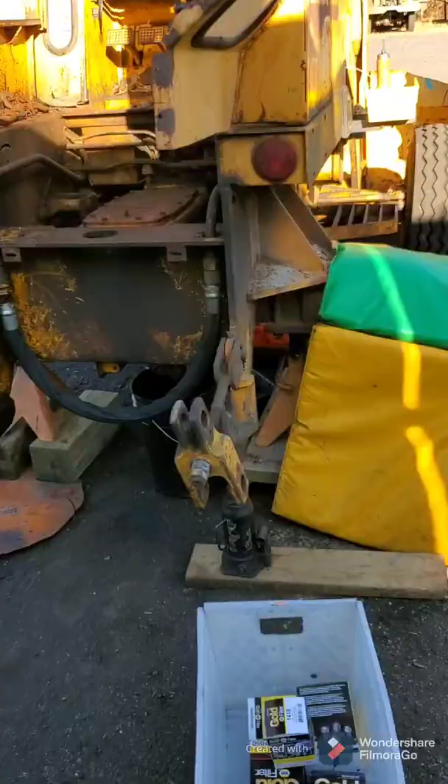Trying to get some seals changed in this thing, and it turned into a nightmare. So here's what I got. We have the backhoe off the machine, to get a better view of what's going on here.

I went to change the wheel seals. To change the wheel seals, you have to open up this cover. There's two large gears in here that have to be unhooked, so to speak. The large nut is like almost like a wheel bearing on the spindle, it just tightens up preload on a bearing here and on the outside. So to get the axle out, you got to slide it out, take the nut off, whatever.

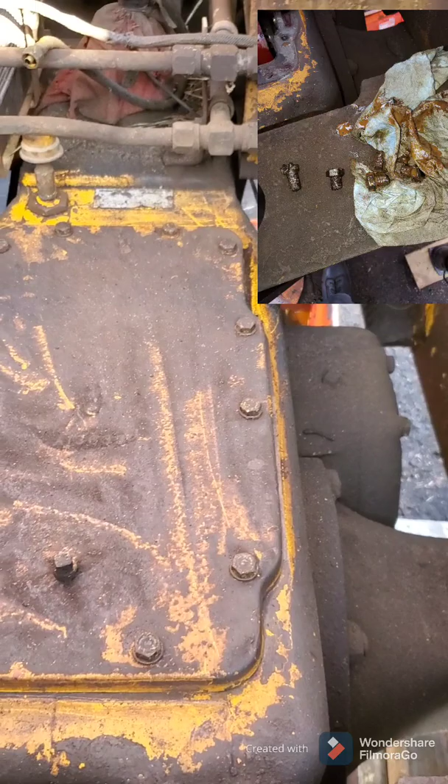Well, in the process of draining and cleaning, I found all the bolts in the ring gear were loose, and some were missing and crunched up in the bottom of the pan here. Which I've got new bolts here for. I'm going to fix that up, clean up the threads inside the ring gear.

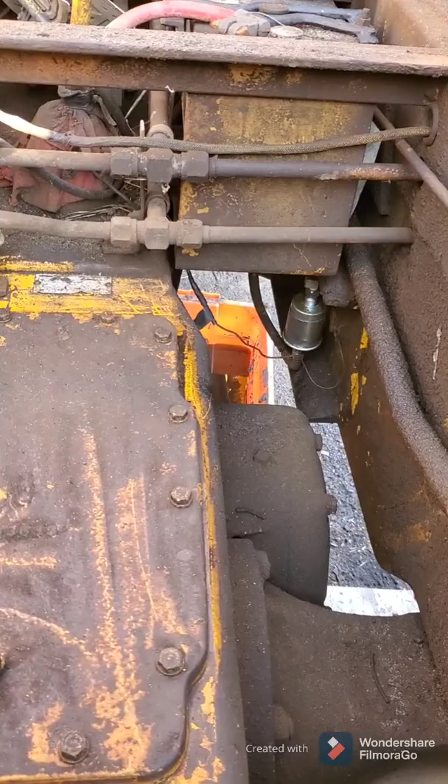But to get the ring gear and the carrier out, the brakes have to come off, and this is where the brakes are on this side, and same thing on this side. So I'm going to take this apart, get the brakes out of there, and then we'll be able to pull the carrier assembly out and get it on the bench to fix it.

As you can see over here, the fuel tank's out. This is the axle, and it might not look so big in the video, but that's the size of a spray can in diameter. So I've got some tools ready, I'm going to get to work here, and I'll be back with an update very soon.

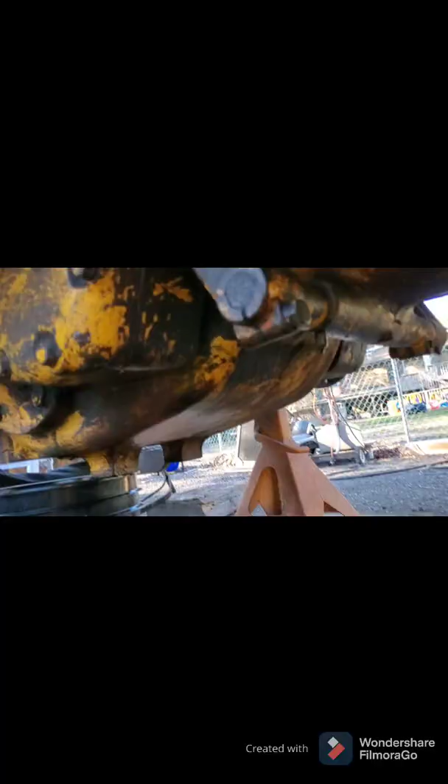Here's how we're looking from the bottom. This is the control for the brake, you get the pedal. This goes forwards, pulls on this rod, and actuates a series of discs inside here.

Pretty easy to get apart, it looks like. Frame of the machine is kind of high and tight, so that's nice, gives me a little room to work. And the other side is similar.

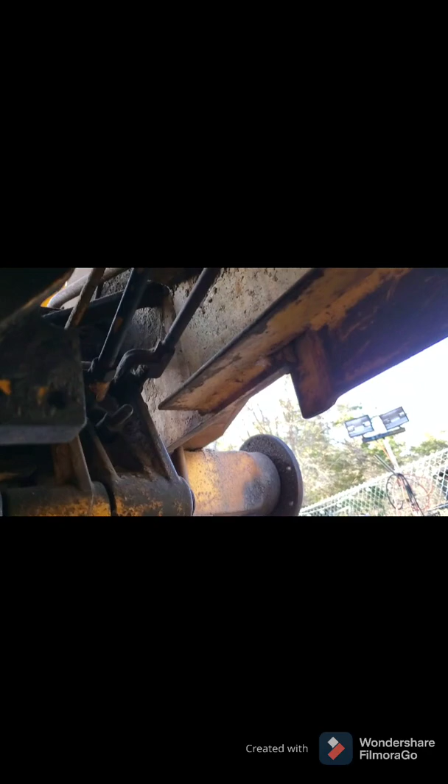You can see it just has some extra connections for the parking brake, which happens to work on this machine. Sadly, the brakes are in nice shape and they're adjusted well. I really hate to take this apart, but that's what I got to do. So let me get started here.

So the linkage rods for this linkage, which is the arm, just like the other side that controls the brakes, are under tension constantly from these large springs that return, which are tensioned up by this bolt. So I have to take the bolt out and get the tension off the springs. This way I can get the clevises out and unpinned, so we can remove the brakes from both sides, so I can get the actuating arm assembly to turn. So that's the next step.

By the way, I broke the adjuster nut off on this side, so now I'm going to have to find that, which is in my box of parts here somewhere.

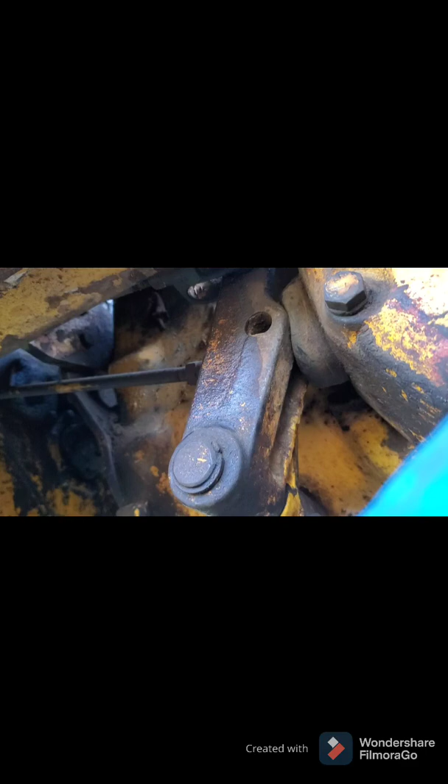There she is. One terrible thing about this machine is parts are not easy to find. Half the stuff I've bought, I just cross-referenced. I bought maybe 3 things from Case in the process of working on this thing. Luckily, I'm very resourceful.

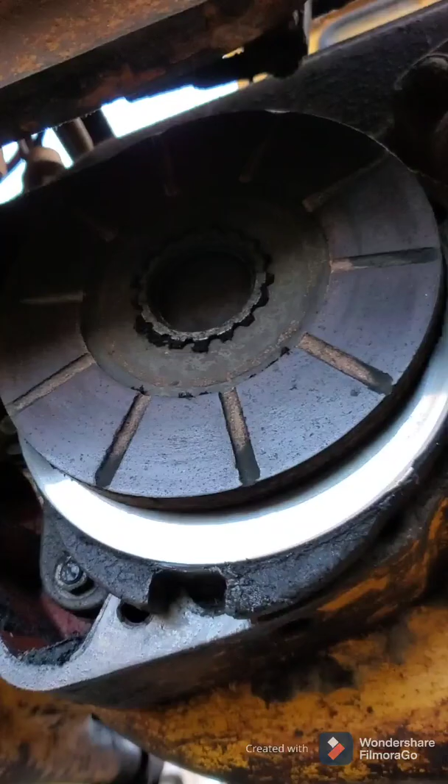Okay, so I got the brakes opened up. These are a very weird design, it's a tractor thing, you won't see this on any kind of cars or trucks. There's one of, I guess you'd call it a disc or a surface. And here's how the rest of the brakes work, these are a series of discs.

Guess I'm not putting this thing down, but anyway, it's a series of discs and a couple plates, and they ride on a spindle.

And luckily, these look real nice, because they're not available anymore, so I'm kind of glad to see that.

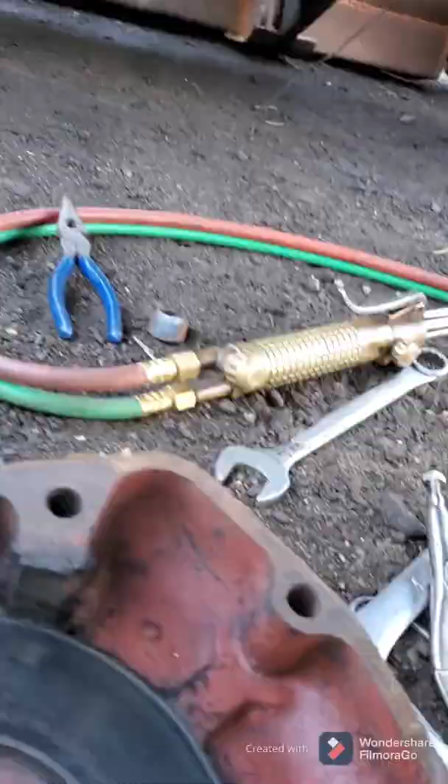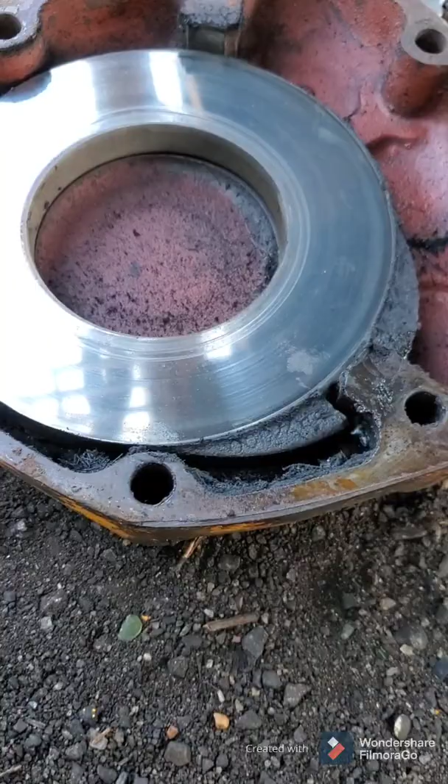And then that first disc comes out and rides against this, and rides against this. This plate is held in place by this tang, I guess you can call it, or detent. I don't know, it's not a detent, but the tab. And then there is another disc.

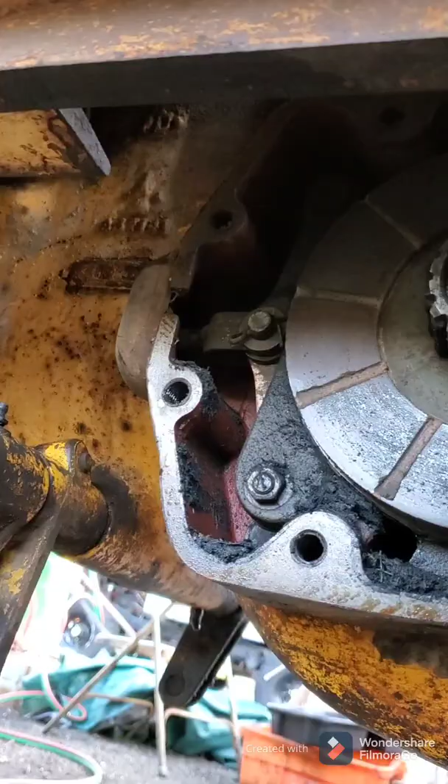Try and get this off of here. Doing this one-handed is a bit tricky. There we go. That's one, also looks really nice, I don't know if you can see that.

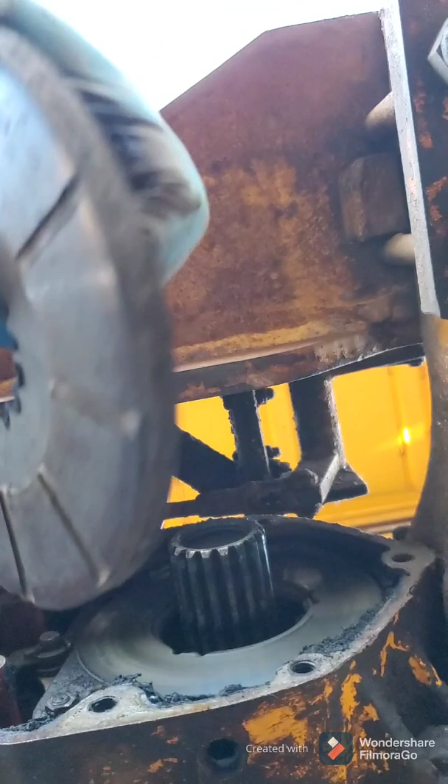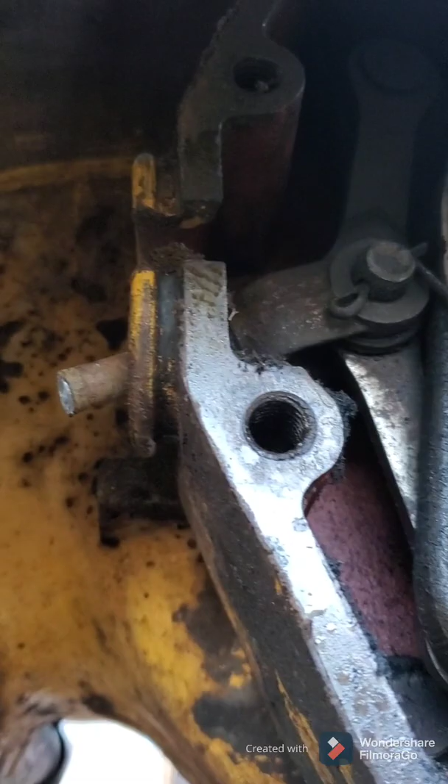And then there is a spring-loaded plate, which will also be sliding off. I'll take this bolt out of here from the broken clevis. See, I snapped that guy clean off, but the manufacturer was nice enough to put this little notch in the assembly so we can get this out.

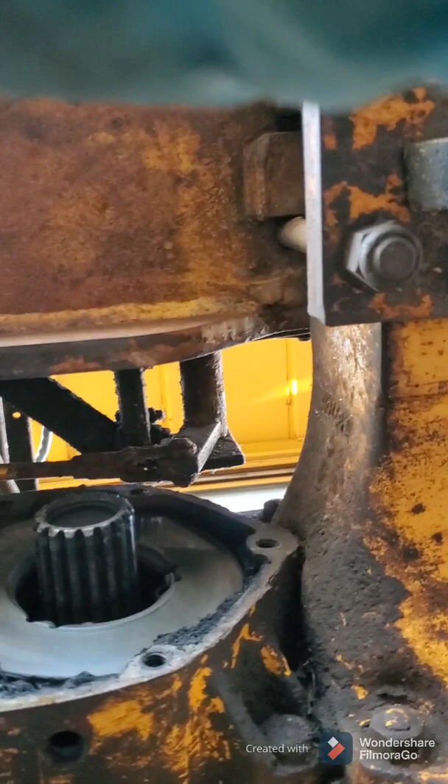But I'm seeing something broken in there, so I'm going to put the camera down again. Pull this off here, try and get this to stand up a little better for you. Sorry for my super professional camera skills, I should say unprofessional.

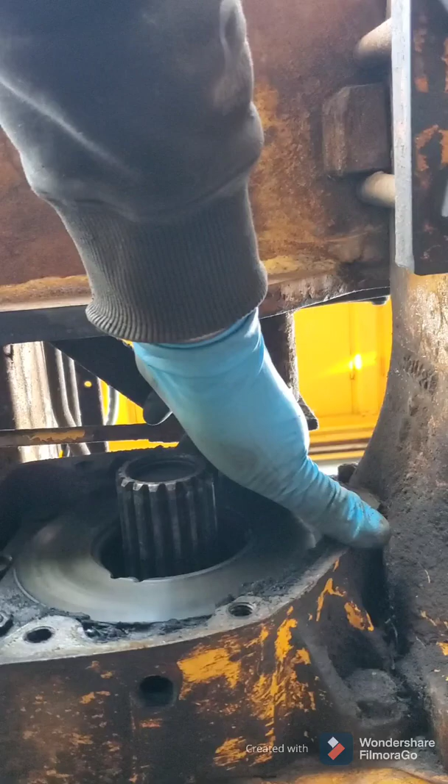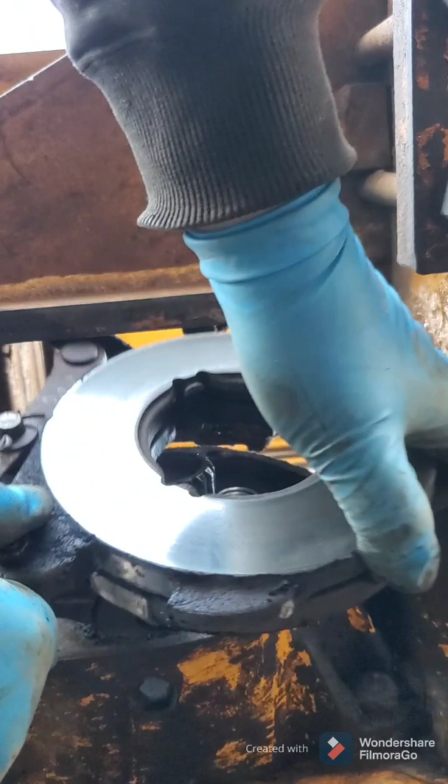Let's see what this guy's all about. Also, there's a tab right here that you can see this brake disc rides on. Yeah, we got some broken brake springs.

Oh, there's one more disc in here, let's pull that out too. This all has to come off to do what I'm doing.

So 3 big discs, and then there you have it. That's the other surface, if you will. Now that these are out of the way, I can pull all the bolts like this one, all the way around it, and remove this housing, which will then allow me to remove this here.

I guess you'd call it an axle of sorts. It's connected directly to the differential, and the differential has gears on it on the inside, just behind this plate, that turn larger gears. So it's a little weird, but if you saw it when it's open, it makes sense, which I'll show you eventually.

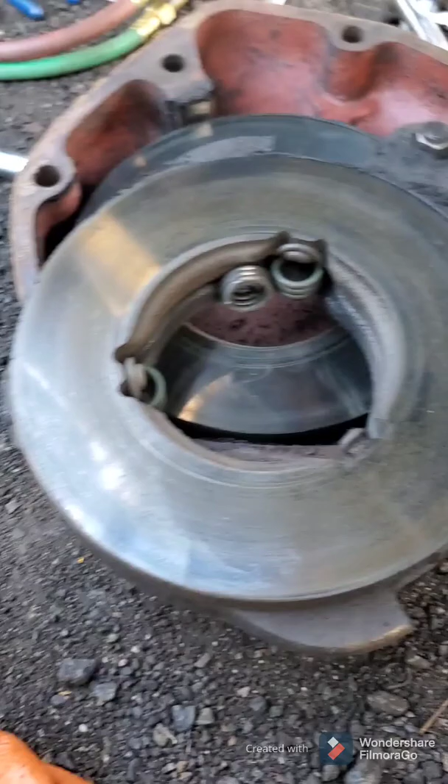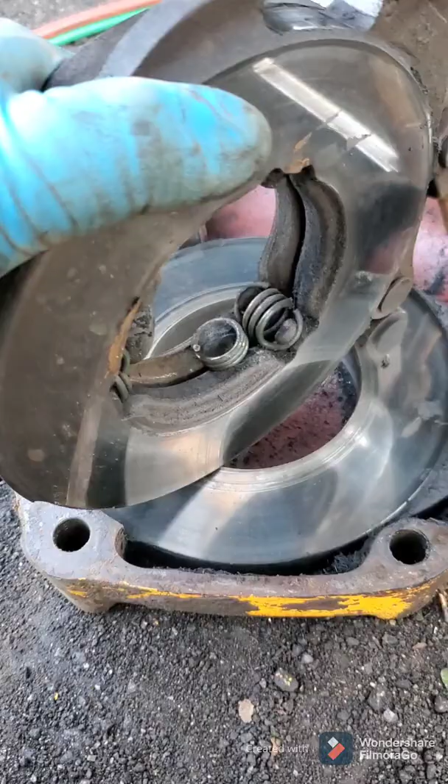So this here, see, we got a broken spring, which I'm hopefully going to be able to come up with. I don't think it'll be a problem. They look like some standard brake spring, like this - I got something from the army truck that might even fit that. The nice thing about these brakes, the springs may be available. Case used a similar design to this on farm tractors as well. My 530 has something like this. It's not quite as extravagant and doesn't have as many discs, but...

Inside of here, this splits, and then there's 3 or 4 large balls - 1, 2, 3, 4 possibly. I believe they're 7/8 diameter. They sit in a little valley, and when you hit the brakes, this and this are pulled together, so they're squeezed. And when they get squeezed, the valley that the balls are sitting in gets pulled and moved, and the balls, it's on a slope, on an angle there.

So when you move it, it essentially makes the area that the balls are sitting in shorter, which then would take this and expand it upwards. It opens this gap, essentially. So what it's doing, it's just squeezing everything between the plate here and the plate here, to take up a gap and create friction and make you stop. So it's really not too intricate of a design, but...

It sure is not the best. These Case tractors don't stop very well. I'm not going to lie to you. My 530 doesn't, this doesn't either. Coming off the trailer, it's always a fun time, let me tell you that.

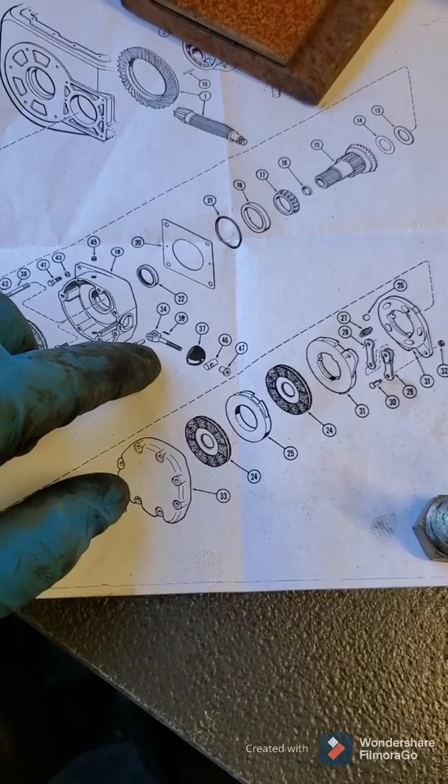Before I shut it down for tonight, I just wanted to show you what I'm going to be doing soon here. This is a copy I made from my parts manual, which, if you're resourceful, you can do a lot with just a parts manual. I got a service manual coming soon so I can figure out torque specs and stuff. But anyway, this piece right here, this clevis, is what broke off over here.

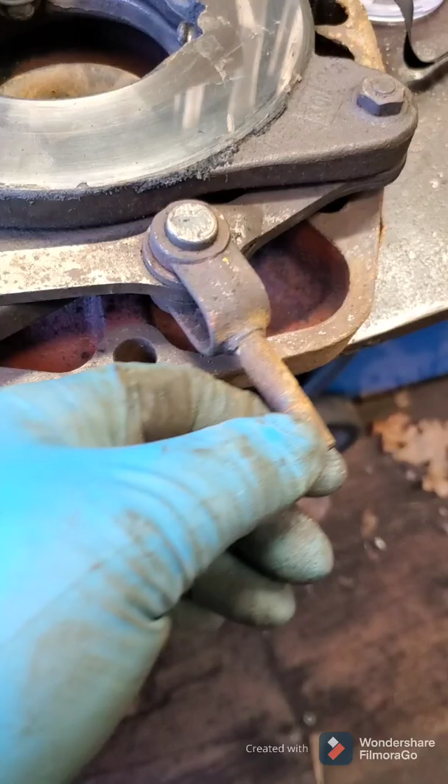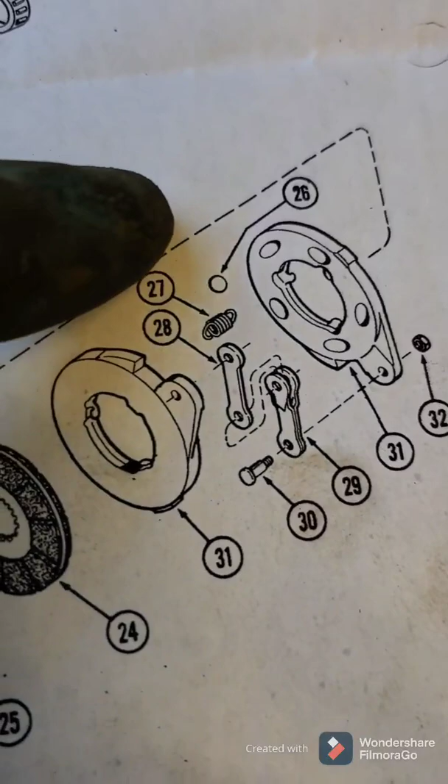For some folks, if this is not available, this is the end of the road for them - they get discouraged. But you can see a better idea of how things are going together: plates, discs, plates, expanding disc - or I should say expanding plate - and one more disc. There's the ball, I was telling you that right there, and you can see in the picture what they kind of tried to show is the angled holes that are elongated. And like I said, these two pieces here twist counter of each other. They both get pulled, one from the top, one from the bottom, and it just spreads it out.

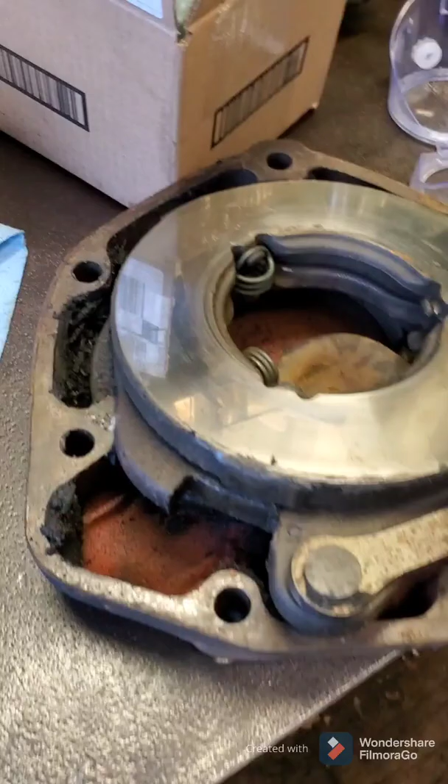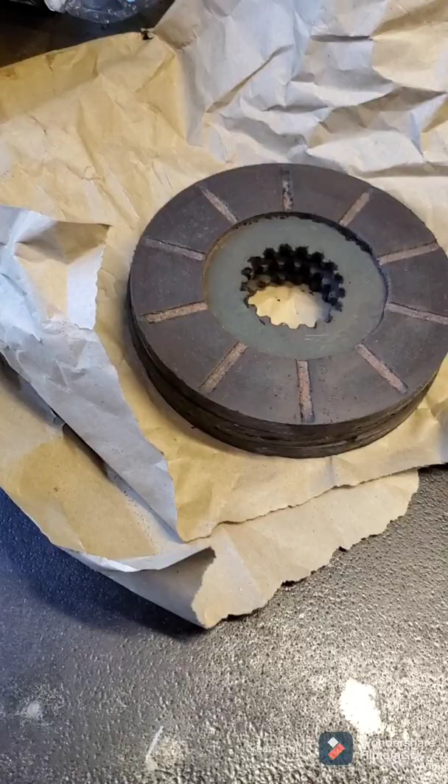I'll probably get into this before it goes back together and take some video of that as well. I got to find a spring, but these should be serviced with some grease, so I'll be getting in there with cleaning this all up and getting everything greased, making sure that this is free of any kind of residual grease, and I'll be cleaning up my discs as well. I don't know what I'm going to do if these are ever totally done for, because they're not available anywhere that I could find.

But if I have to, I will have them relined, I suppose, or make some linings. I can get some kind of brake lining material, and I found this glue from India. If I can get that stuff here, supposedly you can just glue the stuff together. Doesn't sound very promising, but apparently over there it's all the rage, and that's what they do - they glue brakes together like maniacs.

So anyway, this is where I'm at. And then tomorrow, this comes off. I got a new seal coming. This is a shim, not a gasket - that's to set the bearing preload for this bearing. There's an O-ring.

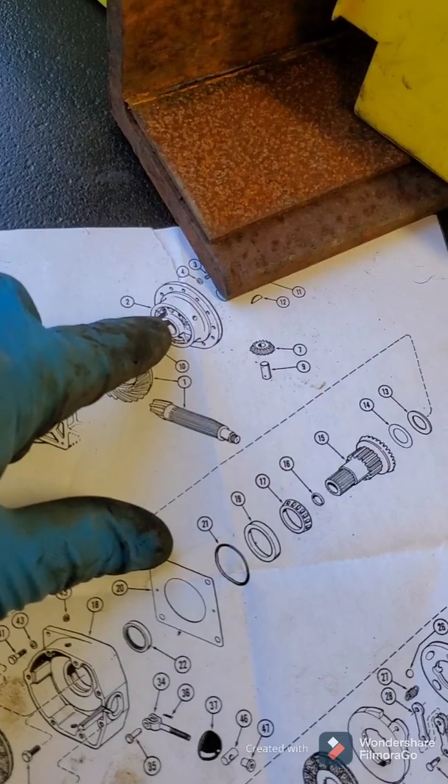I got the bearings coming, and then we'll get this counter shaft out. Then I got to do the other side. Once the other side's out, we can lift this whole unit with the ring gear, hopefully right out of the tractor. I'm not trying to get into the transmission to get the pinion out to make this work, but there's enough room in there. It looks like it should happen.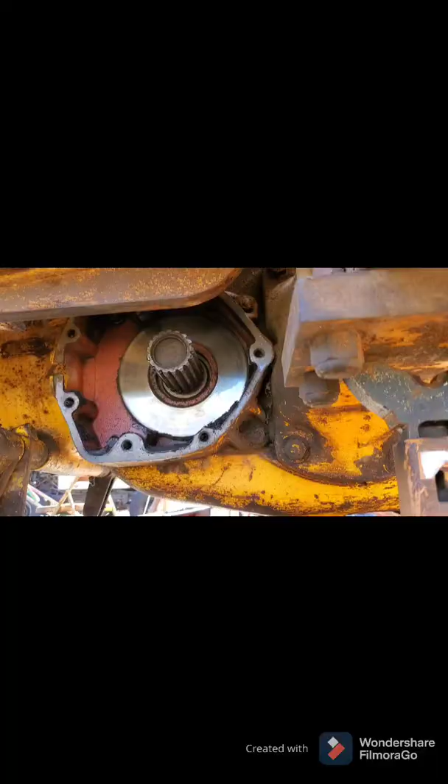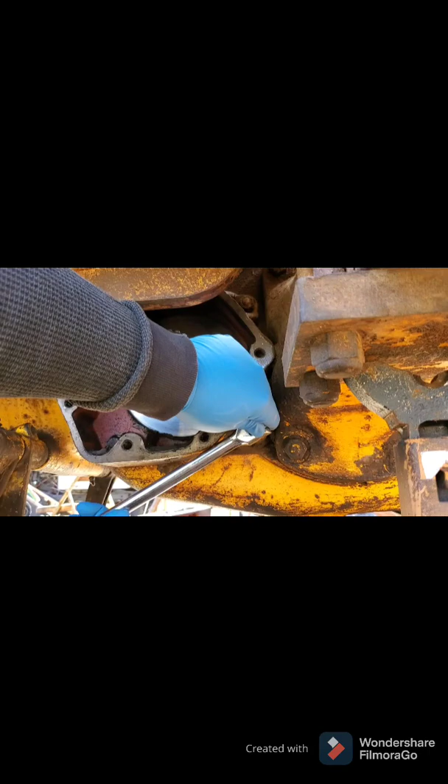So I'm back at it, and we're going to get this outer casing off. There's, I believe, only 4 bolts - 1, 2, 3 up here hidden, and 4 hidden in here. This one is crusty. It should be all 3/4.

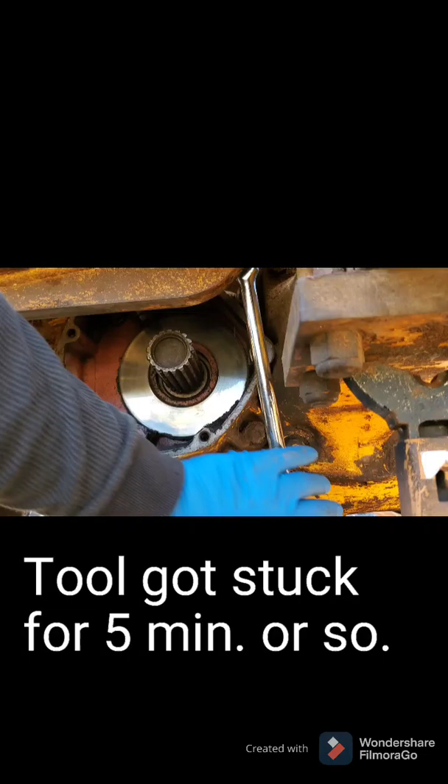Okay, got that out. These are pretty good to go there. It was so crusty it looked like a bigger bolt, but it really was just still another 3/4, just like the rest of them. Let's see here.

A little tight. So I'm going to need a hammer though.

I'm back with a hammer and a pry bar. This hammer, I bought it new a long time ago and used it outside for something one day and forgot it was out there. I later couldn't find it, forgot what I did with it. Years go by and I end up finding it in the dirt under a pile of leaves at my old place. And that's why it looks the way it does.

Trying to pop this thing loose. Pry bar - this is a junky pry bar. I should get something better. That was the first thing I saw.

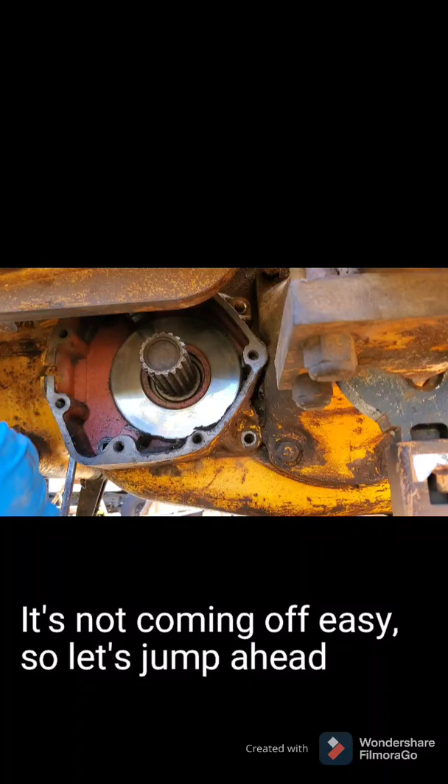Here she comes. Let's see how this works out. This is going to be a little bit tricky, I think. Hopefully that shaft will stay put.

Come on. It's like one of those wheels that has to come off perfectly straight to come off. Alright, so now I got to figure out how to get it off of here. It's loose. Looks like there's a shortage of room. I have to get down here and twist it.

So I decided I should get a look inside of here, figure out what's going on. I've had this open already, not today, but yeah, I left a tool in there. One of the gears is already out.

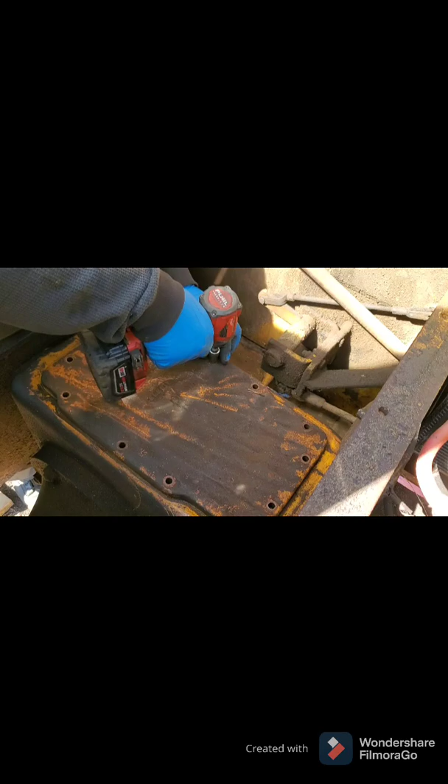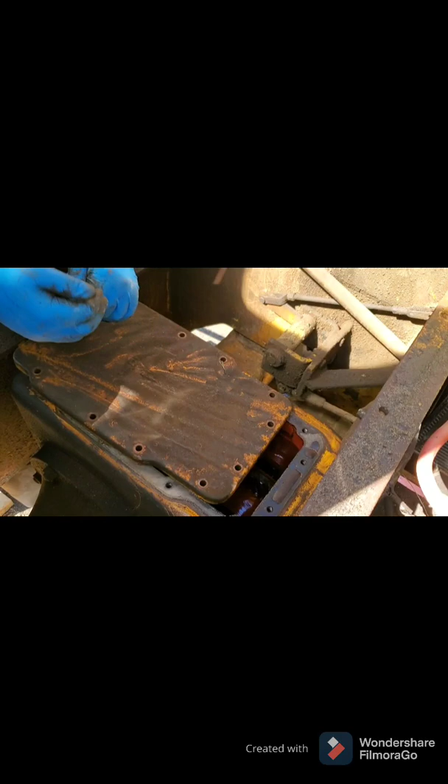Alright, this thing, believe it or not, is pretty heavy. It's like cast iron. Even sounds heavy, dropping all kind of stuff in there. Put this on the bench. There's the gears - or gear. There's the tool I left. Bring it over here so you can get a look at what's going on.

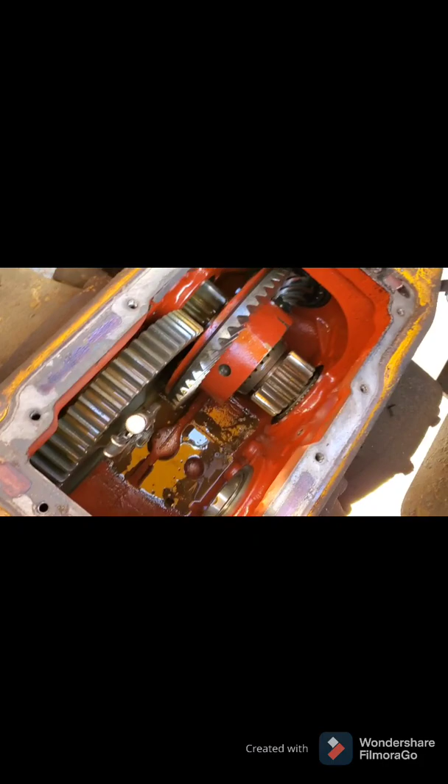So, big gear has to come off. There's the nut down there. Now, you see I use vice grips, you can see the nut moving. The nut, I don't believe it's supposed to be tight. I'm going to find out when I get my service manual here soon.

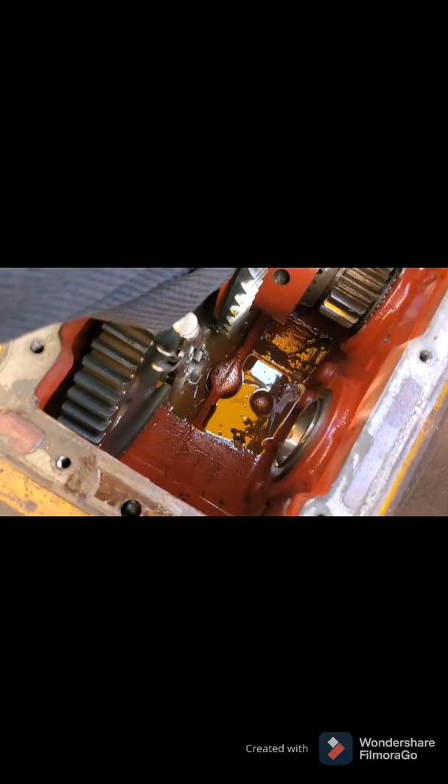This is almost like wheel bearings in the front of a two-wheel drive truck or a trailer. They're only supposed to be sort of hand tight, just to keep a little preload on things. And you see there was another one here. I took it out, the axle's out already. But back in here, that's what's got to come out. This carrier here has to come out, and so does this.

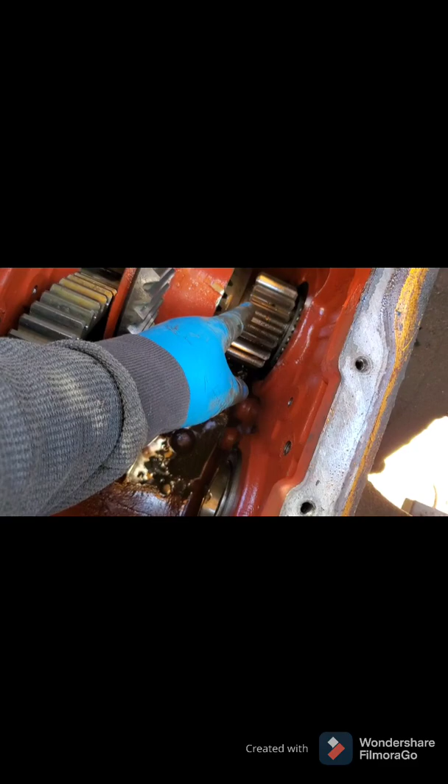Unfortunately, there isn't enough room. You can see the problem I'm having back here. This is holding me in. There's an O-ring there, which isn't a big deal, but this long section is keeping me from being able to knock the housing out to the side. It's just hitting on the side of the machine.

I can tell you I'm really not trying to do anything as far as dropping this rear end out of this machine. I'm just not really feeling like doing that. So I'm going to try to figure this out as best I can, try and see if there's a way we can pull these gears.

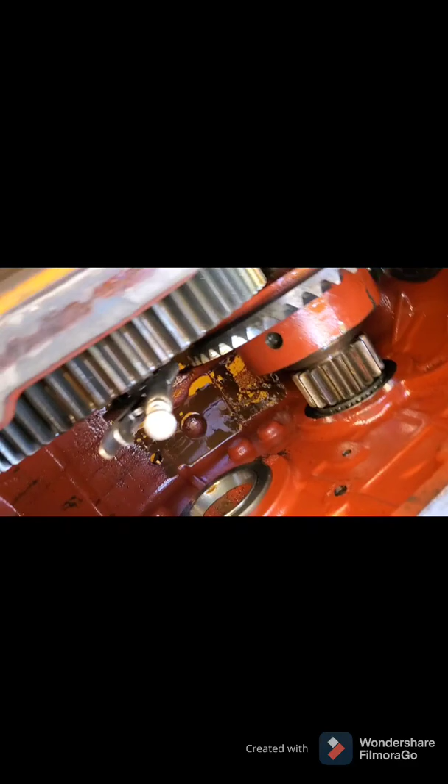I was assuming they were going to come right out. They're almost the same size as the bearing here. But I don't know. So maybe, just maybe, because I can't really see the gear on this side, maybe this side has to come out first and I can just pull this straight out and get lucky. But let's see what it does. They're separate pieces - you can see I'm moving this one in the back and it's loose.

So I'm not going to bore you with taking apart the other side until I get it down to where it needs to be. I'll stop it for now, get that off, and see what happens. Alright, so I got the other side apart, and I found there's been a seal failure. I got some grease, oil I should say, on that disc. Not all of them got really covered, just that last one. I'll end up cleaning that up, probably soaking it in some acetone or something like that.

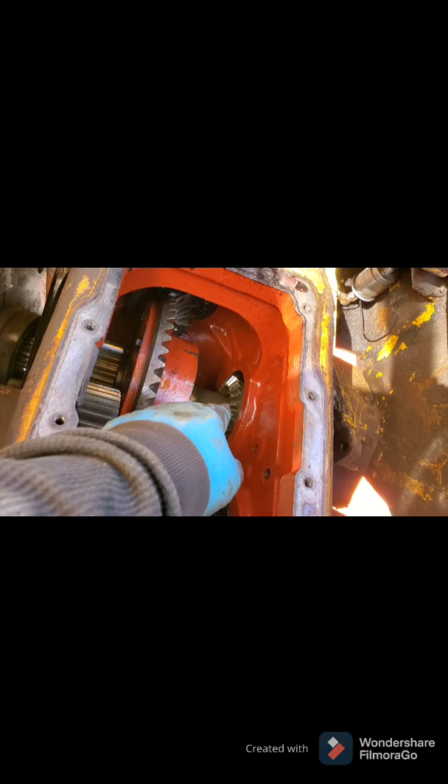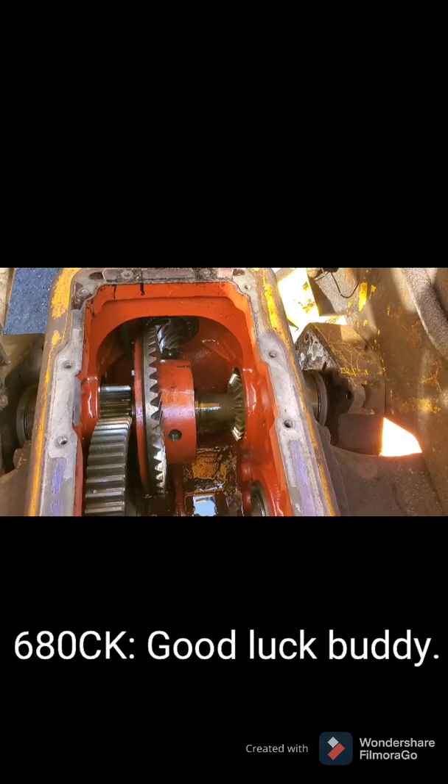And this is where I'm at. The spider gears are in here, and then the flange for the spider is right there. So it was able to move, but this shaft is one continuous shaft. What I'm going to do is, I'm thinking that if I can get the carrier to move over, then I could get the side gear here and the brakes to sort of loosen up and angle down and come out. And if that comes out, there is supposed to be a Woodruff key on the shaft in the carrier. So I'm wondering if I get that out, if I can just gracefully tap out the main shaft this way to get it free from the carrier.

So what I'm going to do now, I'm going to put the camera where we can see, and I'm going to proceed to take this nut off and the big gear and knock the axle out so we can get this out of the way so I can see if this idea of mine works.

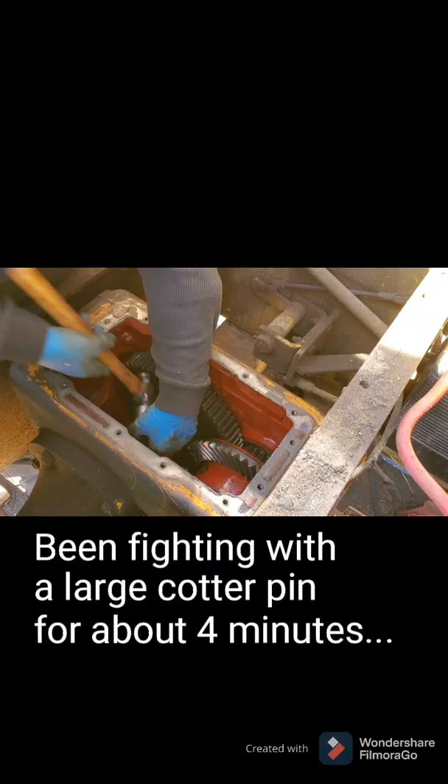And there's the keyway. The keyway, the cotter pin. That should come right off, or come off with minimal effort.

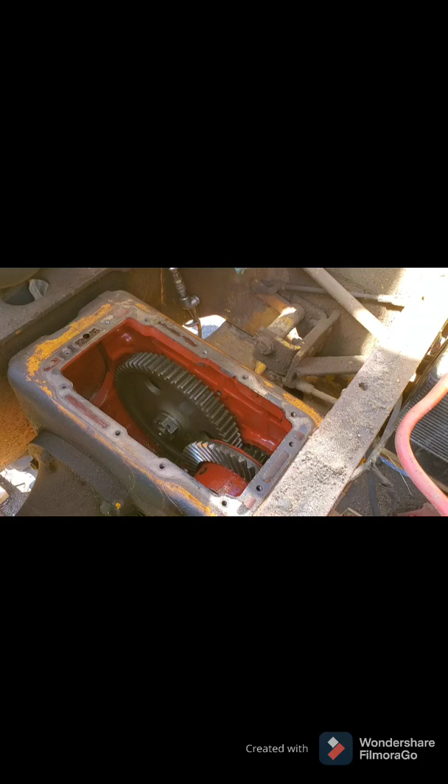The reason I'm using these big jaw vice grips on this is on the other one, when it was in here, there was no room to get a socket in here. And honestly, it's a weird size. I've got some big junk Harbor Freight socket set, 1-inch drive, but it's an in-between size apparently. I definitely don't have a wrench this big.

As I mentioned, these don't have to be tight, so this will work. I might even make a tool for this. I'm feeling ambitious. Either something wrong with the nut, or there was an error in the machining. The other one was similar, but not as bad as this one.

So there we go with that. The washer will probably stay put when I go to pull the axle out. We'll scoop that up. So we have the axle here ready to come out. Hopefully it just slips out like it's supposed to. On the other one, it didn't.

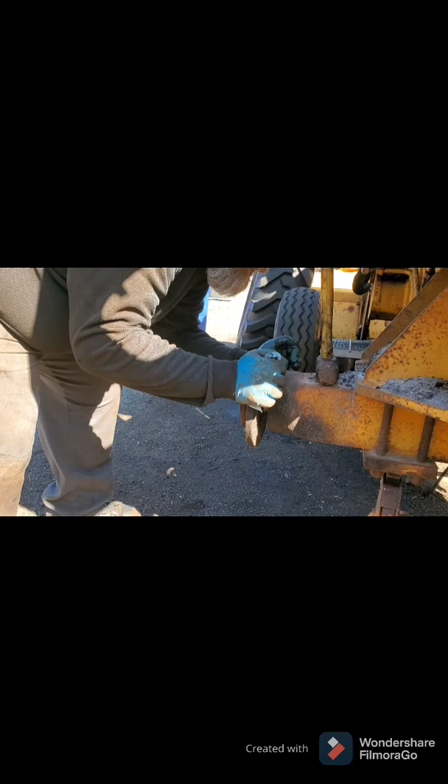But hopefully this comes out. Let's see if we'll just be able to pull it. You can see the bearing's moving. It's also, again, stuck. So we'll be cutting that bearing off later, but for now, knock the seal out.

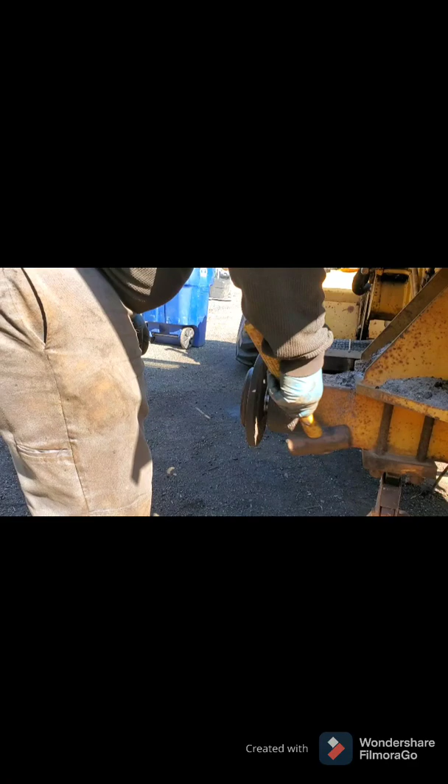There's nothing else holding this. You heard the washer just fall off.

Being a bit stubborn. I'm going to stop it until we get it loose, and then I will bring you back.

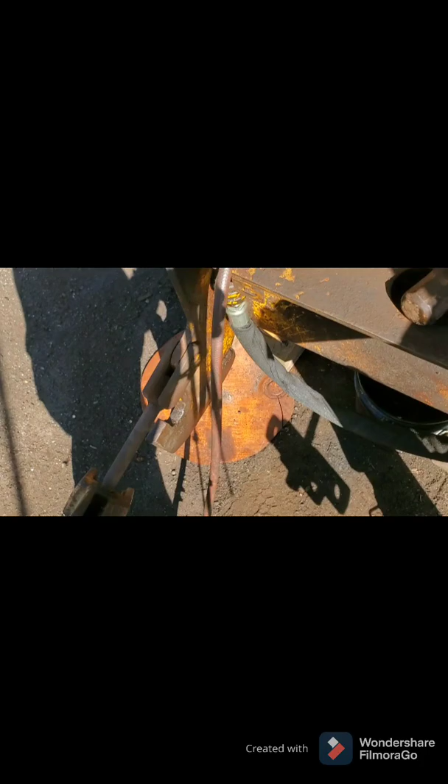Alright, so it's popped loose. What I ended up doing, I'll show you here. I took a very large pry bar and put the nut back on here. And then that rib down there in the center, I got behind it. The pry bar was probably like 6 foot long. I just popped it a couple times and it came loose. Nice and easy.

So now we'll pull the shaft out. This back. We'll take a look at what we got going on here.

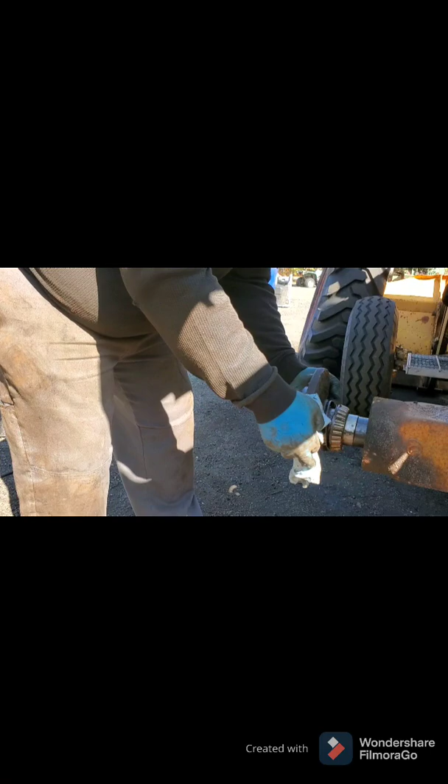Normally I would have cleaned that, but this is all going to get cleaned anyway before this goes back in, because we're not reusing the bearings. Here's the shaft. Large and in charge.

Alright, so I've made some space on the bench. I can put this big gear in there just to hang out, and then we'll pick it up and see what we got here. Noting what side the wear is on, because the bare side has to go back. I don't know if that's wear or if that's just something for the bearing to ride in, but it looks like wear to me. You can see it in this frame here, hopefully. Anyway, so I know that goes to the bearings, so I got to pay attention on the other side.

Now, see if I can't move this thing over. The bearing is out of its race because the race is inside the housing that we took off on each side for the brakes. So let's see if it'll go.

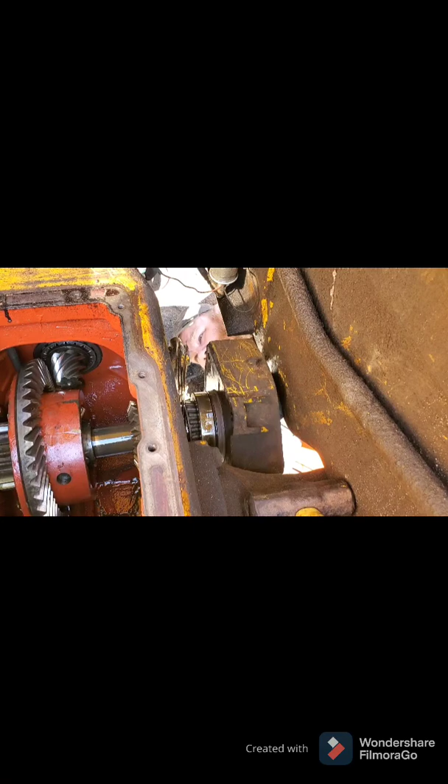I can't really see anything up there, so this whole shaft may be moving and I might not know it, but I think we got something good here going on.

Unfortunately, I don't know, it might be. I gotta investigate this some further, and then I'll bring you back.

If you look, it's completely off over here, so that's good. Now I gotta figure out what to do about getting this out of here. So I'm going to do some studying and see if I can't find a pin or something, and I'll bring you back.

Alright, so I decided this isn't happening. There's no way I'm going to get these out with this rear end in the position it's in on this machine.

So now I'm going to start disconnecting the drive shaft and separating the transmission from the torque converter right there at the shaft, because that's all that's connecting the two - they're separate. Once that's done, I'll figure out some kind of jack stand solution for the front of this rear end, and then I will disconnect it back here at the axle tubes.

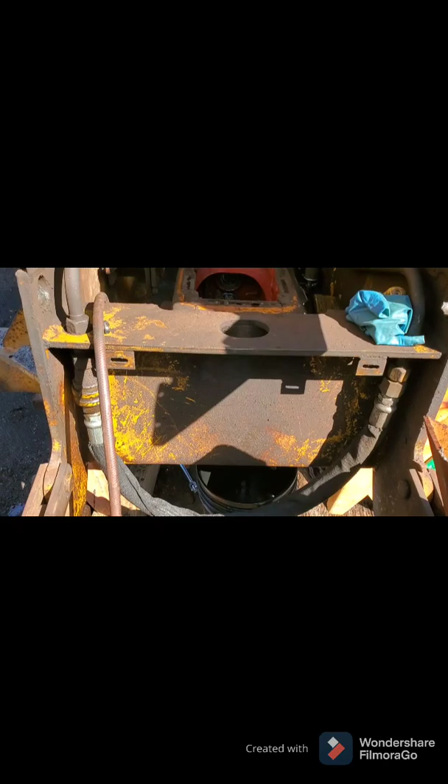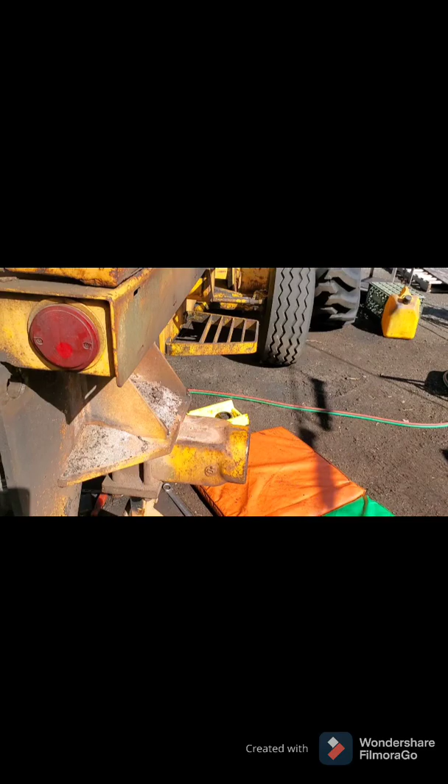What I plan on doing is taking this piece of steel and putting it on the forklift, and getting underneath the two ears for the backhoe attachment. I'll pick this thing up, and once I have it in the air high enough to get those brake boxes out of there, I'm gonna use steel tube, maybe wood, I don't know yet, but I'll put something in between here and the tube, and that should keep it up safely.

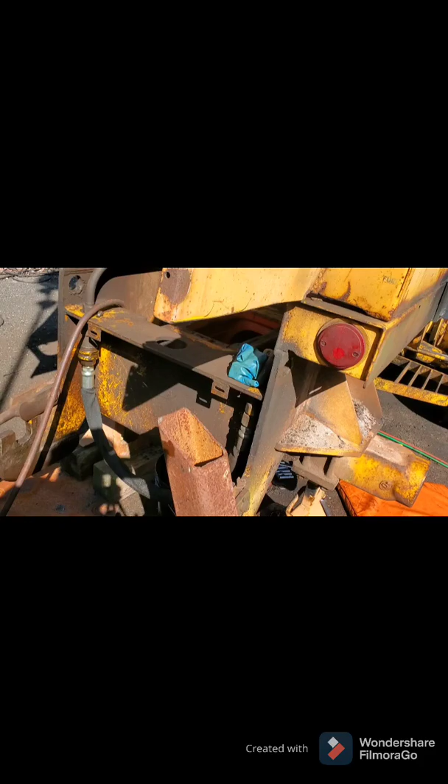As far as worrying about it tipping side to side, the loader should keep this thing sitting pretty, because the front end is pinned in the center and pivots side to side, so the loader is going to be the only thing keeping this from tipping. That shouldn't be a problem. We're not going to go very high, and I'll do it very slow and controlled.

I'm not going to video taking the shaft apart, because that's not really different from anything on a common car or truck, it's just some bolts. You take this joint assembly out and done - did it once before.

Once I get all these bolts on the housing taken off, and the bolts on the front brackets taken off, then I'll show you me lifting it and getting it set up on the stand correctly. Hopefully we'll get these brake boxes off.

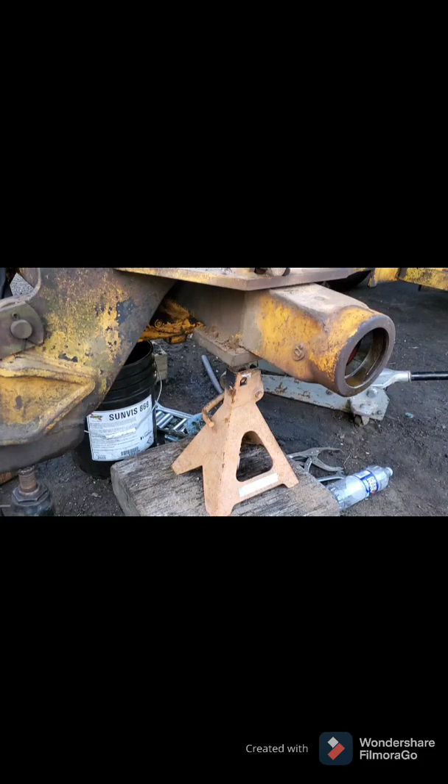Alright, so I was able to get all the mount bolts off. Drive shaft U-joint is out, which I'll show you. There's nothing crazy about it - it's not really a shaft, so to speak, but it's one of these guys.

It's not a CV joint, it's two joints, so there's a block in the middle to make it all work.

So now I'm all set up for the lift here. The setup I'm using - I was going to do the forklift, but I decided I might have more control with bottle jacks, so I want to use those.

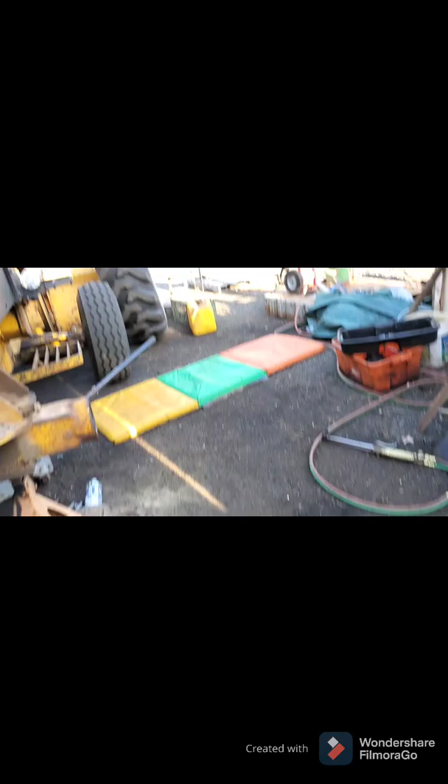Before I start, on each side I'm going to be scribing a line. I don't know if there's a pin like a normal car or truck, or if this just has to go where it's supposed to go. There is, on the bottom side, metal pieces that locate it forward to backward, but I don't know about side to side, so I'm going to do that on both sides to help me out later.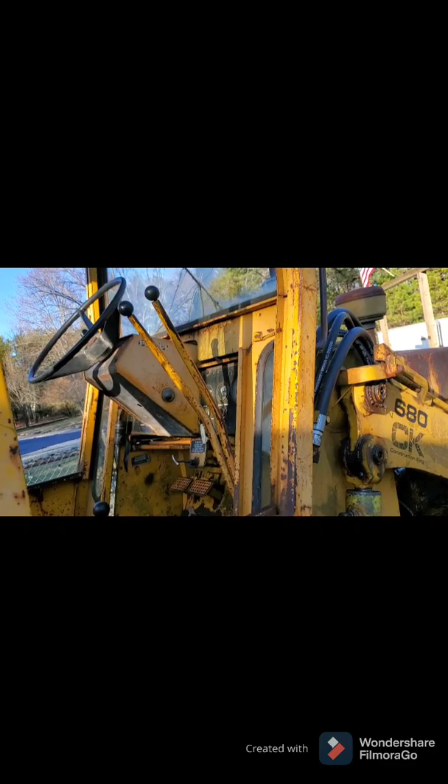And I'm also going to be coming in here periodically while I'm lifting to release pressure on the loader, because it's going to try to pick the whole machine up. If I let off a little pressure here and there, it'll be easier on the jacks and won't be as sketchy back here.

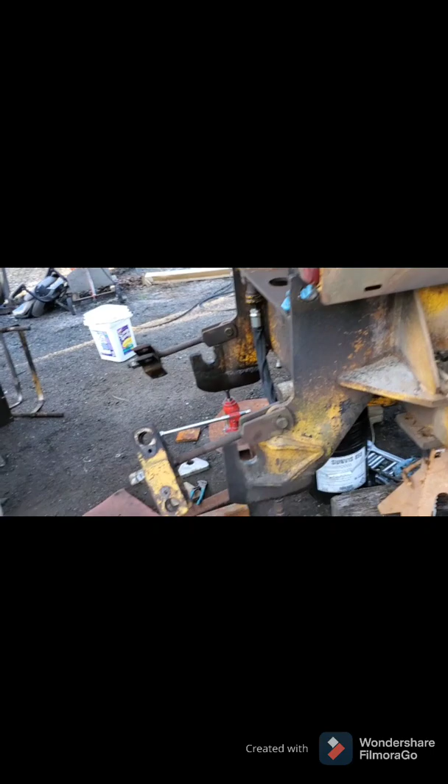So we're going to get started with this. I'm hoping to get 2.5 inches of steel in between.

Seems to be working pretty well. But got some steel in here. I don't want to stick my fingers in there, that's for sure.

I'm going to go take a look at the front mount, make sure it's coming apart. Let's keep going.

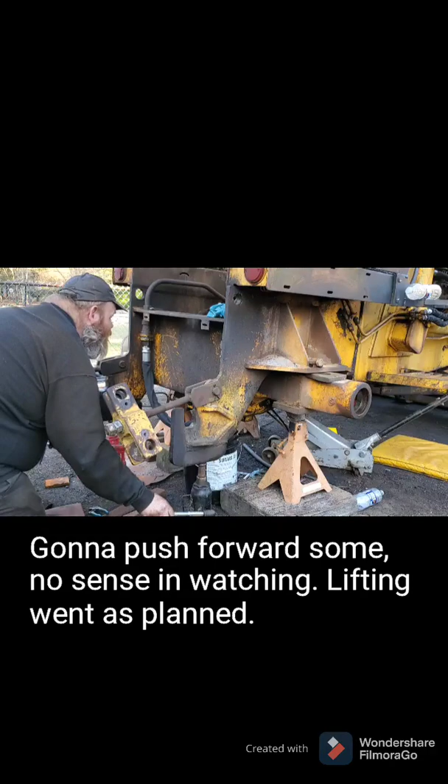So the one side is definitely clear. The other side, I'm hoping I can turn it and clear it. So I'm going to bring it up just a hair more and put those 3/4 inch pieces in.

This side looks like it's definitely ready to come off, so I'm going to take that out first. I'm hoping when I do that this side doesn't go falling. I really don't want this stuff to fall because I'm afraid if something breaks, I'll be really in a bad position, and we don't want that. So let's do this.

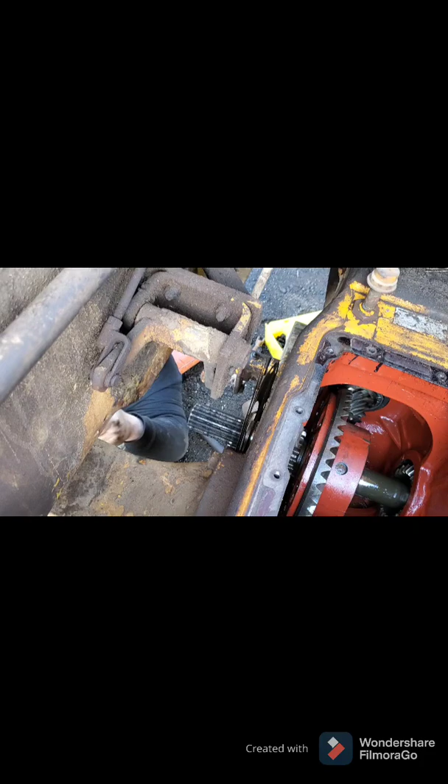This one looks like it's got a new seal in it. Somebody's been in here before. Now these shims, I'm going to take these and put them on the bench after I clean up tonight, and leave them right here with the machine, and they will be put right back in the same spot after I clean them up.

Now let's see if I can get this shaft out of here. And we're out, you can see that. That's a good day. Sure took long enough. All right, now for this side, let's see if we can get this out.

There she is, heavy as it can be.

These shims, I believe there's more to them than just setting bearing preload. Not 100% sure, but they very well may be for setting backlash in the ring gear, and that's very important to put them back in the same position, because if not, it could change the backlash if these are indeed part of that.

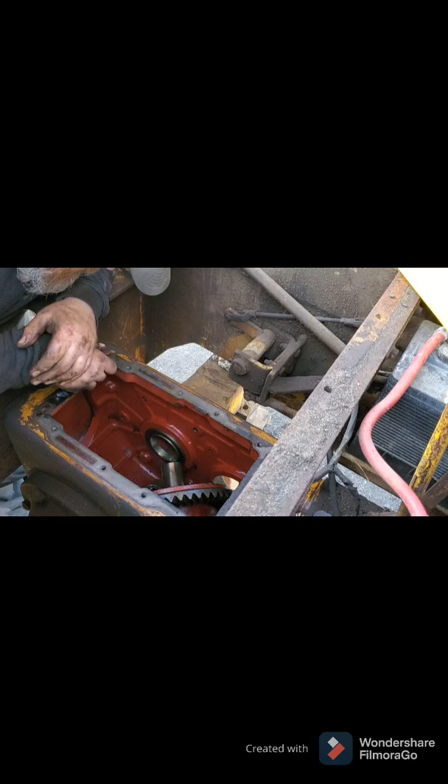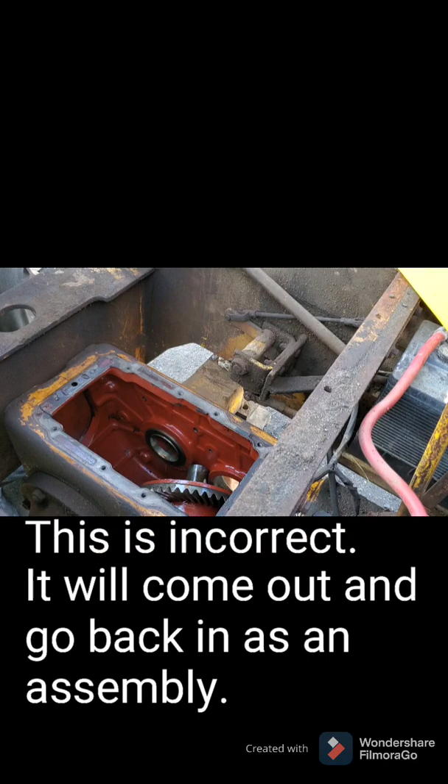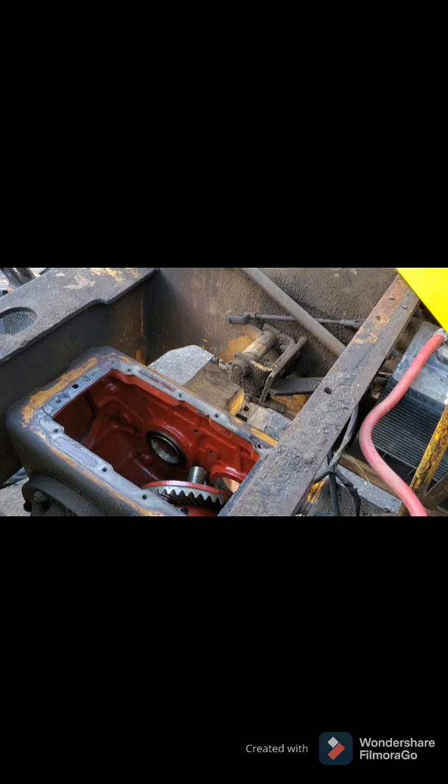So what I came up with to try, I don't know if it's going to work - I separated the ring gear from the carrier. I'm going to try to pop it off the carrier and see if that gives me a hair more room to twist the carrier. I got a feeling that this may come out of here with these two grooves. I don't know why else they're there other than for this reason, or maybe the shaft's supposed to come out with it, but I got to be able to put the ring gear back on the carrier on the bench, so I'm trying to safety wire these so that doesn't happen again.

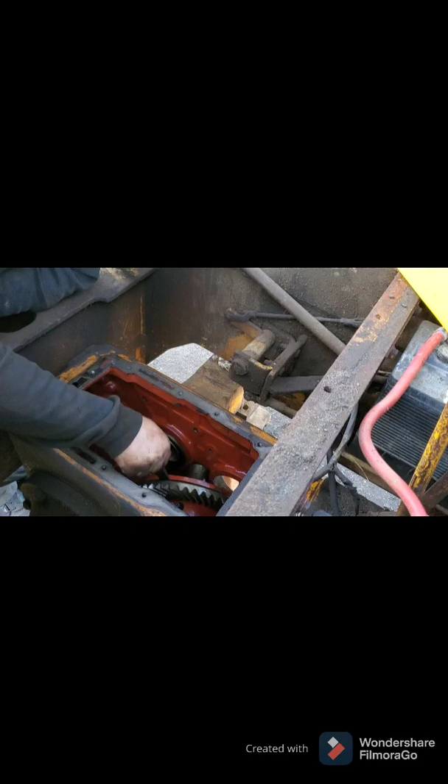I found only 6 out of 12 bolts were holding this thing together, and those were all loose. If they weren't jagged and chipped up and the threads a little bit hammered, they probably would have came out by hand.

I'm trying to pop this ring gear out of its machined home. There it goes, right off. So now it gives me about another inch or so on each side to try and get this to fit out.

Reminds me of one of them stupid metal puzzles everybody has and plays. Goes together one way and can't go together another way. But here is the ring gear. We got a couple broken off, close to the surface though for most of them.

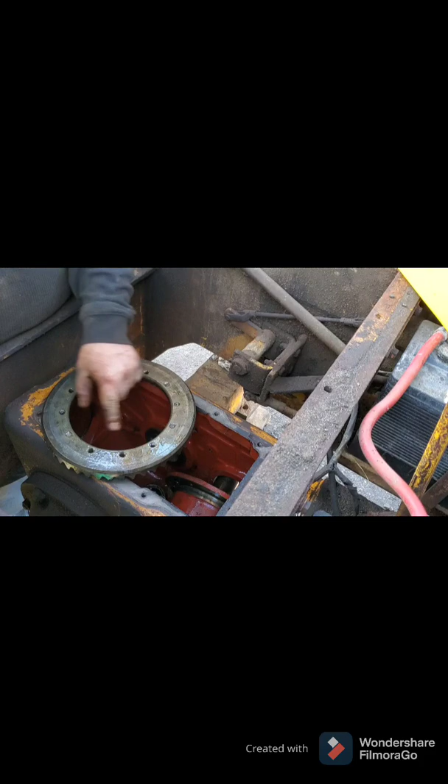Got 1, 2, 3, 4, 5 broken off. This one's kind of low. The rest I could probably weld nuts to and get out of there. Just be real careful, I don't think they're going to be too awful tight. Just got to get a hold of them.

So, all right, so that part's out, and I'm going to go and move this to the safe spot on the bench, and then we'll try and get that carrier out.

All right, so let's see if this is possible. I don't think it is. Let's try it another way. Oh, maybe. I don't think so. No.

There it is, it is out. Thankfully.

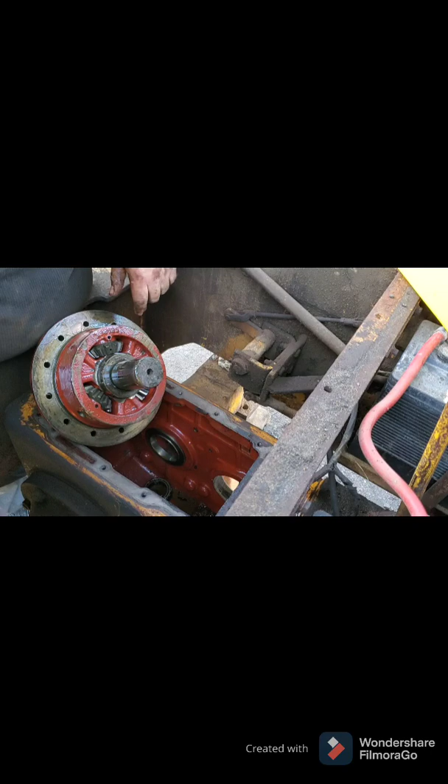Alright, yeah, so I'm really hoping to get this out easily, like not having to press it out or anything like that. I don't know if these holes are for it, you can't see in it. This might possibly be something for, you know, a puller or something to press it out on the machine, from one side, because I believe that it's supposed to go this way.

What does the other side have? The other side has one as well, but I have to clean it out and see. But yeah, some of these holes are looking a little rough. Lots of time getting beat up.

Half tempted to drill this thing out to 1/2 inch and drill and tap that ring gear to half. I definitely don't think I'm going to be able to find a new carrier. You never know, but one can only hope and dream.

But I'm going to try and fix it. I don't see this not working. There's enough good holes that I think if the bolts are tight, even if I put it back together like it is, I think it'll be all right. But I'll make that determination here soon. Yeah, that's it so far.